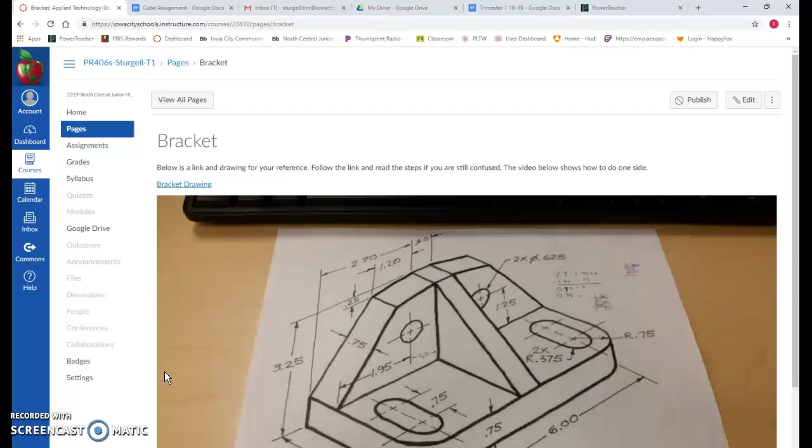Alright, today I'm going to show you how to draw the bracket. I'm only going to show you half of it because as you can see from this drawing, it is going to be a symmetrical object. So what that means is what you do on one side, you'll do on the other. Now looking at this drawing, which is in your canvas, there are a lot of different dimensions. Okay, so I'm going to go over and try to explain each one of these by drawing them.

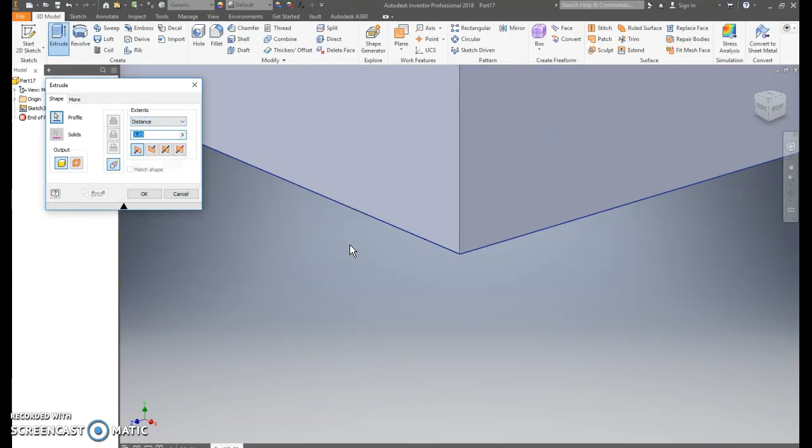Okay, so first we start out with a 3 by 6 by 3.25. So go in Inventor, start with our rectangle tool, click and pull. So 3 tab 6, enter, finish, extrude, 3.25, enter, and we have our starting shape.

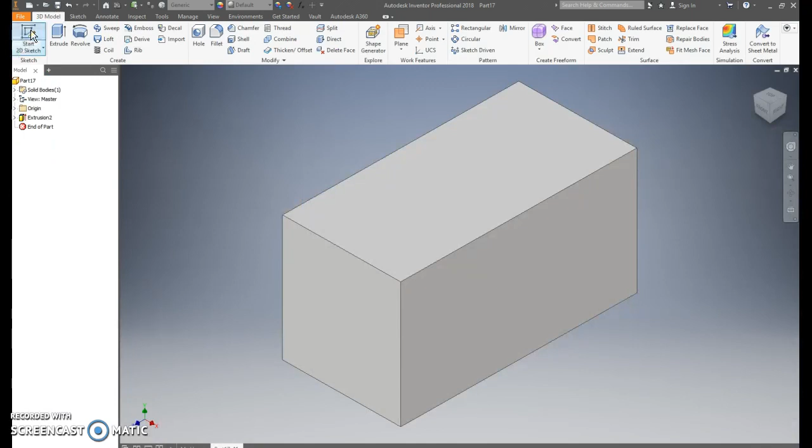Okay. The next part is we're going to draw this back wall. Okay, so the thickness of that is 0.75. The thickness all around is 0.75, as you can see as well. So we're going to place a point here and dimension it away from that back wall. So start 2D sketch on top, take your point tool. On this line, you can either do it with the coordinates or you can bring it over here, click, dimension, choose the point, choose the line, bring it down, and change that to 0.75.

Okay. From there, we will draw a rectangle on that point, bring it all the way over. Okay. So the top dimension, which is currently blue, should be 2.25. The next one, if you hit tab, should be 2.7, enter. And we get that because of this dimension right here. Okay, so this line to this line is 2.7. So imagine we just drew this box right here.

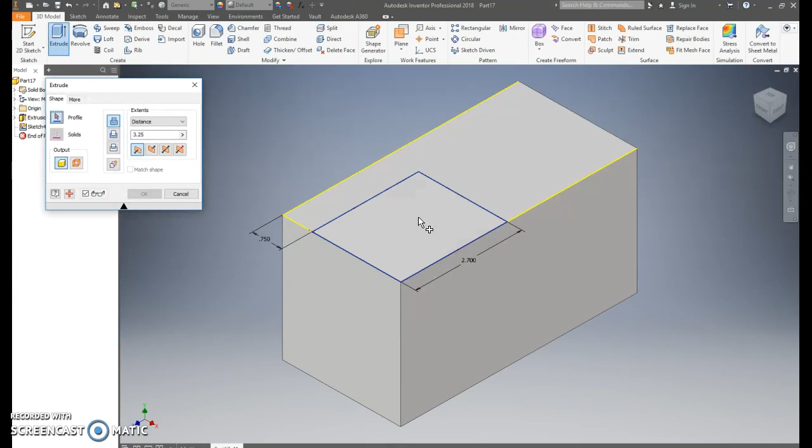Okay, so back into Inventor, going to finish the sketch, extrude it. If it doesn't pop right away, click it, go down. Okay, so like I said, the thickness is 0.75, so we need that left over. Easy way is if we just go minus 0.75, enter, and it automatically gives you the thickness we need.

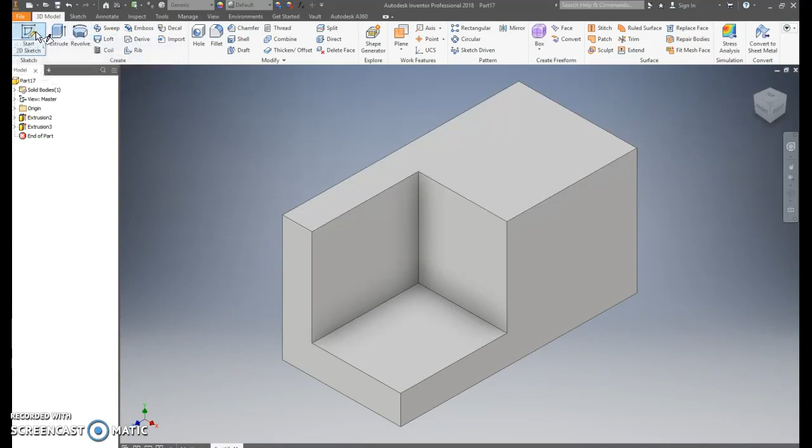Okay. Next, you're going to click Start 2D Sketch, and you're going to go on the back. Okay. This is where we're going to draw this circle. If you notice, from the center circle to the outside, it's 1.95, and then from the center circle below is 1.25. Okay, so since there are so many, you're going to have to check each side to see if the dimensions line up and if you're looking for a specific number. Okay, the size of the circle is going to be 0.625. The 2x diameter 0.625, that just means there's two circles that are that size.

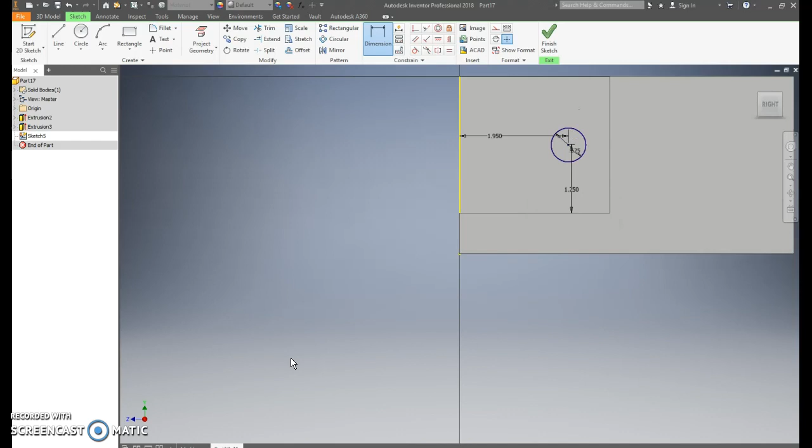Okay, so back in with our circle, we're gonna click and 0.625, enter. Next, you're going to go dimension from the center to the outside and click. That's going to be 1.95. And from the center to the bottom, that's going to be 1.25. Just make sure that that was correct. Yep. Okay. Then we click finish, extrude, click the circle, and the opposite way. Click OK. Now we have the circle.

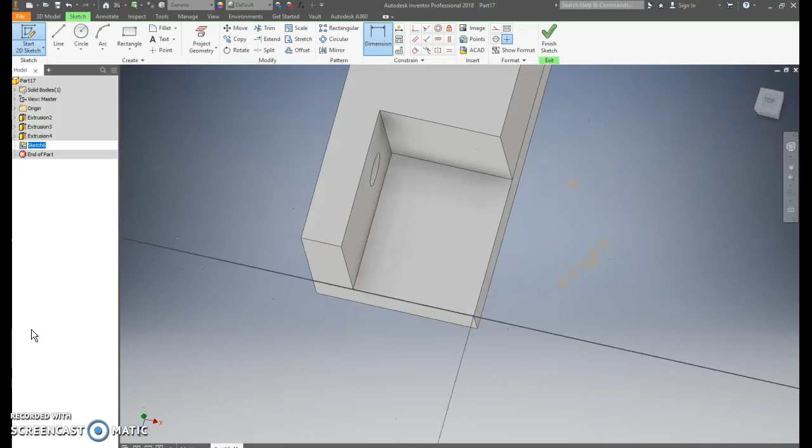Okay. Next, we are going to draw this little shape. Okay, it's known as the slot tool. So if we go back in to Inventor, click Start 2D Sketch on that face. Under Rectangle, you're going to find Slot Center to Center. Click on that. First, before I do that, we're going to have a point. So click there, okay, because we're going to move that point. We're going to move it from this side, 0.75, and we're going to move it from this side, 0.75.

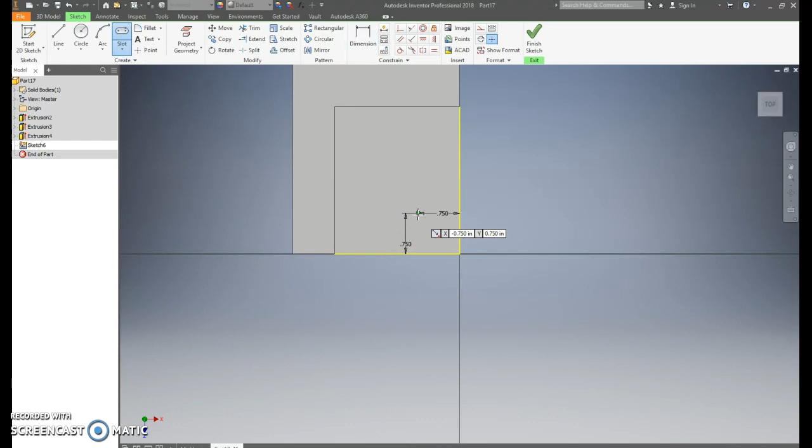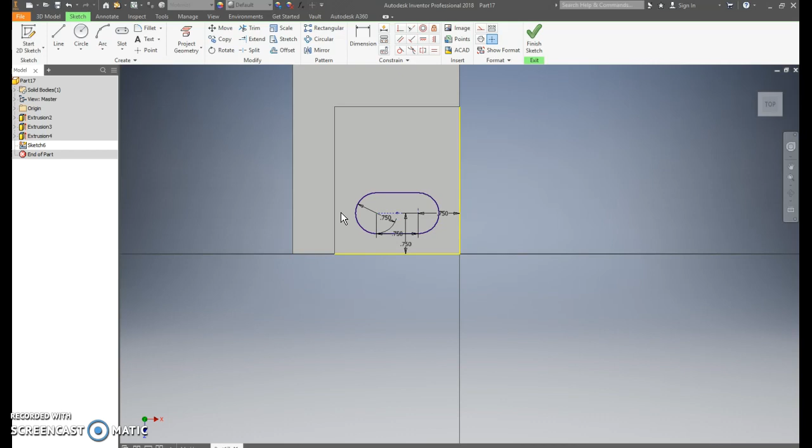And then we're going to find that slot tool again. Click. Make sure this line is straight to the left like that, or towards the back wall. Okay. This is going to be 0.75, enter, and then 0.75, enter. Okay, so it's in 0.75 from each side, straight line 0.75, and then the entire thing is 0.75. Click Finish, Extrude, click the object, opposite way, click OK.

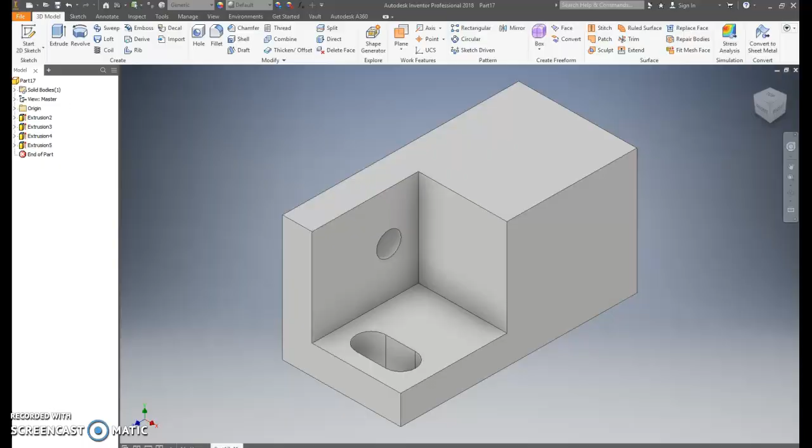Next, we're going to cut out the back part. Okay, so if we look at this, this is kind of confusing, but if you look at it, it will make sense. Okay, so what we're going to do, we're going to place a point, and from that point to the inside is 1.2. Okay, from the top line to the point is going to be 0.25. Okay, so start sketch on the back. Okay, we're going to go point right there. Dimension. So if you remember, from there to the top line was 0.25. From there to the inside line was 1.2.

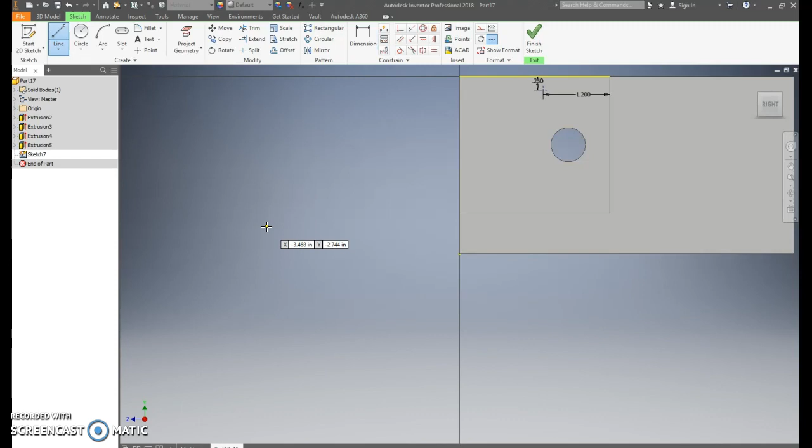Enter. Okay. Then you just get your line tool. You go from the corner to that point, down to the corner, up to the left corner, and then from there to where we started. Click Finish, Extrude, choose it, opposite way, click OK.

Next, we have to curve the corner like it is in there. Okay, and if you notice, there's an arrow R 0.75. That's saying that the radius of these corners are 0.75. So we come in here using the fillet tool. Okay, however you'd like to say it, you just click on it. We choose which edge we want to curve, which right now it's just that one, and then we change the radius to that 0.75 and hit enter or click OK.

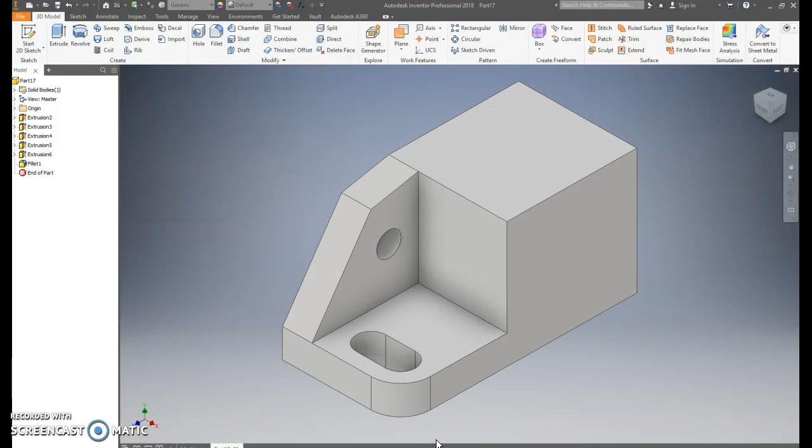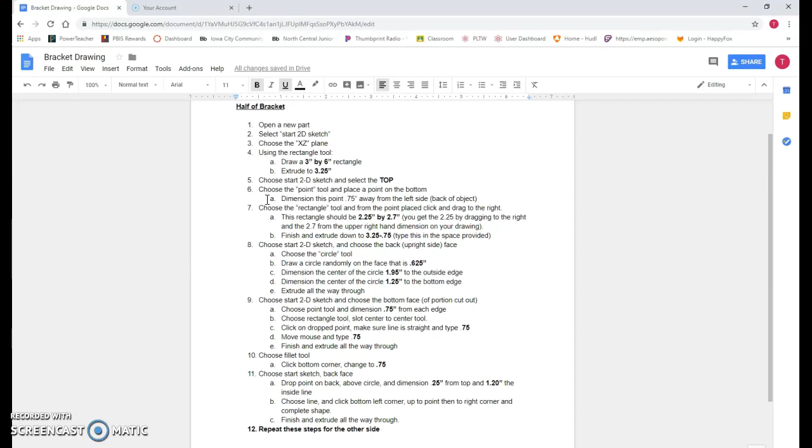So that is half. You would do the other half as well, and then don't forget to slant the center of the bracket. Okay, so go ahead and do that now. If you have any questions, feel free to look over these steps. I went step by step, or watch this video.